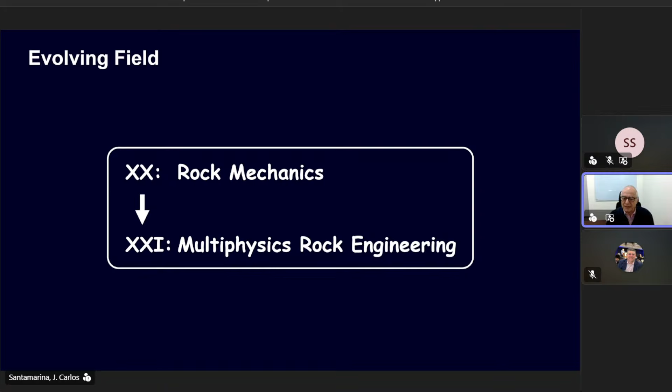The title of the presentation is on fractured rocks, and let me start with the following statement. This is an evolving field. Throughout the 20th century, we thought of rocks in the context of rock mechanics. However, as we are moving further into the 21st century, now this is not about mechanics alone, it's about multi-physics rock engineering. And this is readily noticed if you visit the ARMA conference or the journals in our field, and you see that the classical themes used to be laboratory mechanics, rock mass classification.

It was quite empirical, quite deterministic, and it was driven by the infrastructure development, the tunnels, the support design for the tunnels, slope stability within the mining industry. For example, rock burst has always been a challenging problem, and lots of activity related to petroleum geomechanics, such as fault reactivation or wellbore stability.

However, if you see the titles that are beginning to prevail in our journals and our conferences, what we see now is all about multi-physics, fractured rocks, coupled processes, thermo, hydro, chemo, biomechanical, very extensively instrumented, both laboratory and field implementations. And now more and more we see physics-informed machine learning and AI-assisted engineering.

And the drivers are also evolving. There is a lot of influence related to the energy and the energy transition. For example, we see the carbon capture and storage, compressed air, hydrogen, the whole reuse of existing energy infrastructure and the decommissioning and the deep underground. So it is not that the classical problems are behind us. It is that there are great challenges and opportunities ahead of us.

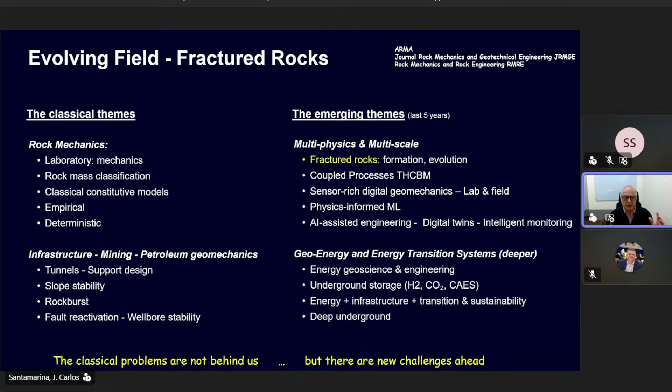And in this context, I would like to present the following slides, split in three big groups. One is to talk a little bit about intact rock and the formation of rocks. Part 2 will be a little bit on fractured rocks, and part 3 then will merge all these together, exploring properties and processes. As the saying goes, there is a little bit old, there is a lot borrowed, and there is something new as we go through this presentation.

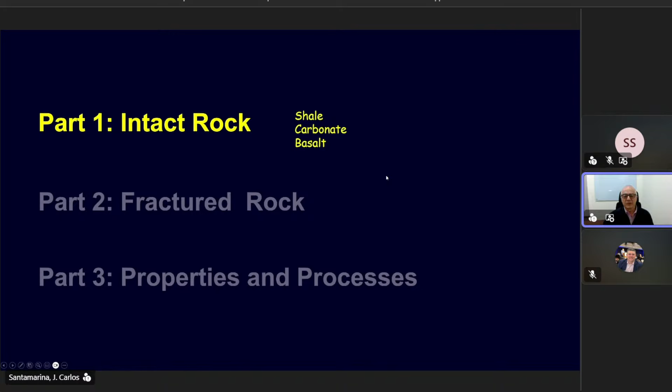I will address 3 rocks today, the shales, carbonates, and basalt, and the choice is not arbitrary. It's because of shale gas, most of the remaining oil is in carbonates, and basalt because mafic rocks are all of a sudden regaining some interest in the context of carbon mineralization. But in order to properly work with these rocks, we need to understand where they are coming from, and so shales. The first thing that comes to our mind when we think of shales is that idea of fissility, the idea of breaking in that blockiness that is not so obvious or easy to understand.

And once again, let me remind you that the playing field of the energy sector in the US and around the world has been dramatically changed in the last 20, 25 years because of shale gas, whereby from a well pad like this one, probably there are 10 to 20 or more horizontal wells running sometimes 2, 3, 5 kilometers away from the pad in an amazing deployment. But there are still important questions related to that.

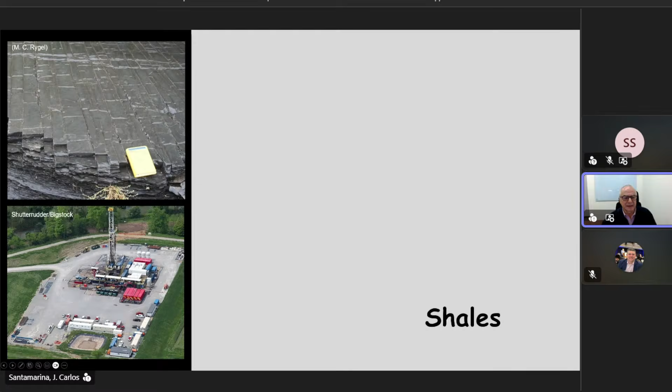And so let's address shales, and shales are very complex because in order to understand shales, we have to start really at the atomic scale, at 0.1 of a nanometer, because that is where molecules, water molecules and ions are interacting with the clay surface, what some of you will recognize from Jim Mitchell's work, and the double layer and that type of phenomena, and osmotic pressures.

But then these clay particles really are not working that independently by the time they have been buried for a long time and pressure, and they work in teams forming tactoids. And these are these bunches of clays. There are maybe tens or hundreds of clay layers forming these tactoids, and they bend and they break like when you play with cards.

And as we begin coming up in scale, all of a sudden we see the layers and the strata. And if it goes bigger and bigger, now we see the big reservoirs, which may be hundreds of kilometers. So folks, 100 kilometers is 10 to the 5 meters, and we started at 10 to the minus 10, so we have gone through 15 orders of magnitude. This is challenging, and these are shales.

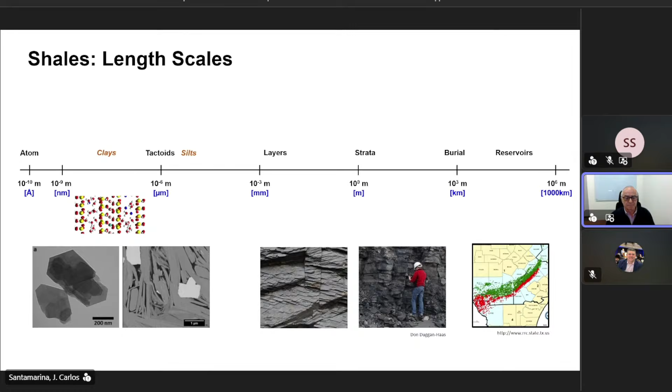I used to think that shales were highly compressed clays, but that was very short-sighted. Actually, shales are a mixture of carbonates, silicates, and clay minerals. And depending on what percentage of clay minerals, clay may be dominant and control all the behavior, but that is not necessarily the case.

And when we zoom in and we look at shales, remember that probably they started like a slurry with random orientation, but then after they have settled and gotten squeezed by the overburden, we see the more rotund particles, the silicates, the carbonates, and precipitates, probably pyrite framboids, and this porous sponge, which is the organic matter. This is a shale. 1%, 2%, 3% of organic matter gets trapped in the sedimentation process, and that organic matter is the one that becomes the kerogen and the gas that leads to shale gas.

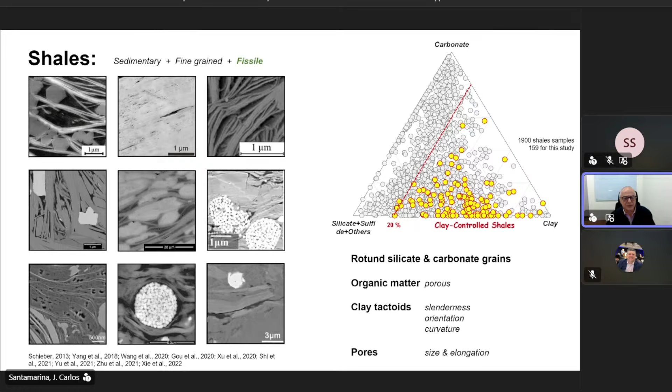So let's try to understand this better. And so we took UDEC and we represented every particle in UDEC, and these are different combinations in that triangle that I showed you before. So we may want to focus here on the right-hand side. And in this case, you see the organic matter are these darker blobs. You see the tactoids that have bent around. In fact, we have calibrated the program to capture the stiffness of these clay tactoids. And we actually are running measurements here in the laboratory with very thin films to get those properties right.

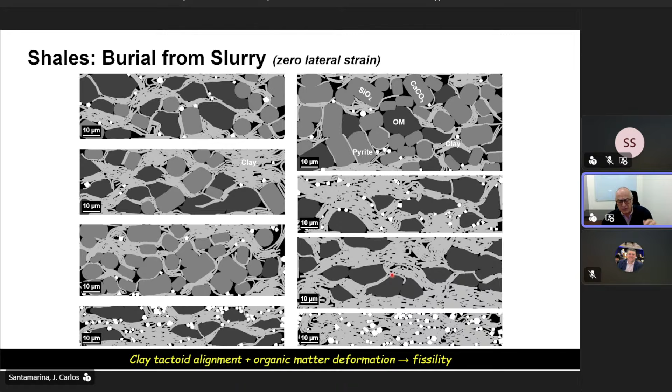And so what happens is that as the clay sedimented from random orientation in this suspension, and organic matter got trapped and some of the rotund particles as well, the particles become increasingly more aligned transverse to gravity. And not only the clay particles become aligned, but the organic matter, which was quite spherical to begin with, now it is soft and viscoplastic, and it gets squeezed and forms layers across. This is the origin of fissility. Without this formation process, we would have a mudstone. If we have a shale, it's because this alignment has taken place. And we have huge implications for all our design and working with shales.

Now, let's talk about the genesis of carbonates. And first of all, let's recognize that we've been working with carbonates for a long time. The Sphinx is a single chunk of carbonate, and the bulk of the pyramids are all carbonate blocks. And these date from 4,600 years before us. But it was all massive. By the time the Greeks were building the Parthenon, the columns and the beams had to be very thick because they couldn't take much tension. In fact, if you go and observe carefully, many of them are actually exhibiting shear fractures near the support. The deformation failure mode has changed. And that is 2,500 years ago.

And then by the time the Romans come about, they learned really how to use the material and geometry together, and they developed the arch leading to the Colosseum and all the beautiful archwork from the Romans. So in this process, we learn the strength of the materials and the properties of the materials.

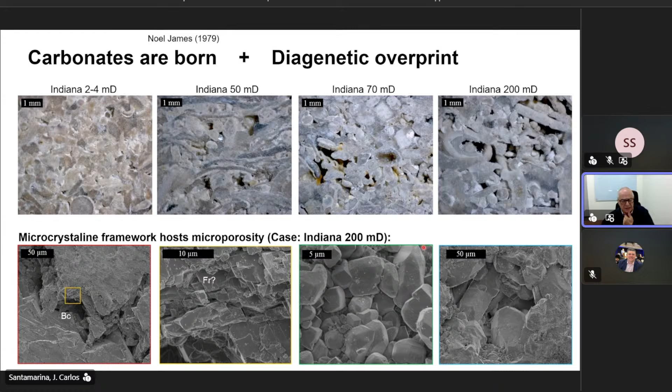But where does it come from? Somebody said that carbonates are not made, they are born. And why? Because it's all about bioactivity in the shells and the foraminifera, etc., that gets gradually buried. And during burial, the pressure and the chemistry come together. There is pressure dissolution and reprecipitation, and sometimes they form these micrites, carbonates, where there are reprecipitates. This is a carbonate, born, and they are diagenetically overprinted with these processes during burial.

So, not surprisingly, if it started from particles, at very low confinement, it keeps very high porosity, and in fact, it goes to the porosity of an extremely loose sand, like a carbonate sand. Then it gets gradually buried, and they're diagenetically modified, building up not only stiffness, but also strength. Therefore, these are almost like percolation equations that both stiffness and strength disappear when you go back to a suspension.

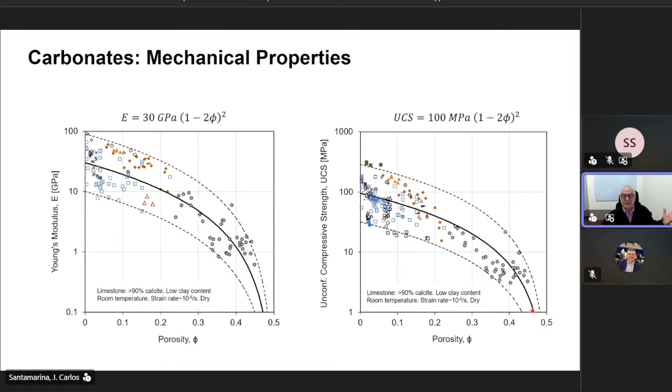Now, what happens to the permeability of carbonates? Initially, this was a real cloud of points without discrimination. But then Lucia went and recognized that all carbonates are different. So if you look at carbonates carefully with thin sections or in the microscope, etc., you realize that some of them are made of very small particles, and the fines control the permeability. Some of them appear almost like a sand with no fines, and there are different names the geologists use to characterize these rocks.

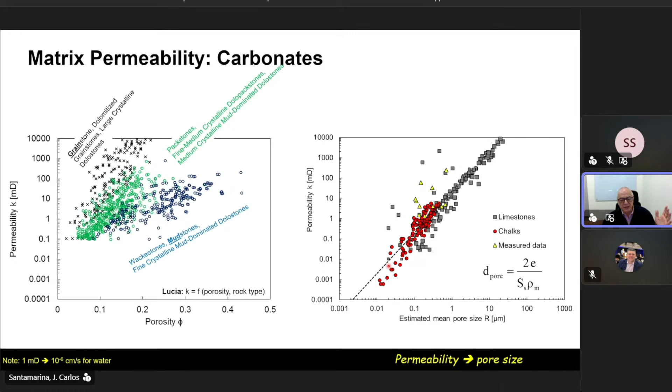So if you take porosity and type of carbonate, like fines content for the soil mechanicians, this is totally equivalent to that, you begin to see that you can begin predicting the permeability quite well. Now, if that is the case, I can combine the porosity or the void ratio in this case, and how much surface is available, the specific surface, to get an idea of what is the mean pore diameter. And now if I plot that data of permeability versus that mean pore radius or pore diameter, the correlation becomes surprisingly robust. This is the formation of carbonates and the development of stiffness, strength, and permeability.

Now, I said that the other rock that I wanted to explore with you today and from the genesis are the basalts. 40 years ago, in the 1980s, geochemists recognized that basalts are not as stable as we thought, that under certain conditions, the geochemistry can be quite fast. And then they began doing some calculations starting 25 years ago, and they said, yeah, we may be able to capture the CO2 injected into basalt formations, mafic formations, calcium and magnesium silicates, and this will react relatively fast and convert the CO2 with the dissolved cations into calcium and magnesium carbonates, so we mineralize the carbon.

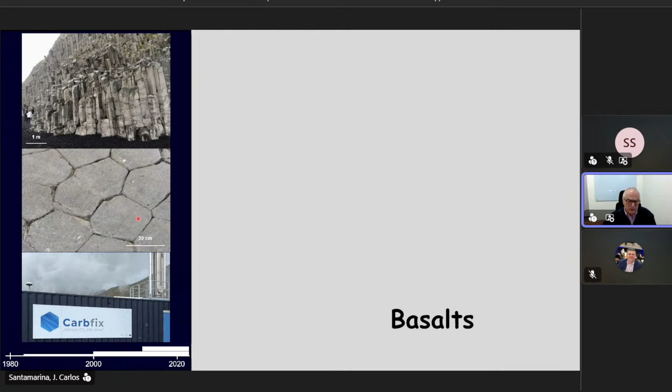The most beautiful example is CarbFix. There is also a project in the US. CarbFix has done it very successfully in Iceland. The issue is, what is the aperture of these fractures and what is the porosity of the rocks? The fractures are always responsible for the highways of transport, and the porosity in the rock is all about storativity and then reactivity. And so we went back to look into these formations, and we have visited a large number of basaltic formations, and this is more or less a summary from the literature and our own experience.

We have a magma chamber, and the magma has lots of dissolved gas. So as it begins coming out, it gets depressurized, gas comes out of solution, nucleates forming bubbles, like when you open a Coca-Cola bottle. And then these bubbles begin growing, and sometimes they coalesce, and sometimes they expand so much it's an explosive eruption, or sometimes it just flows out, forming lava fields. Those lava fields eventually cool relatively fast for crystal growth, and so it forms these basaltic formations. And if the cooling is slow, then it develops a contraction pattern similar to desiccation cracks, but now it's because of thermal contraction, and they begin splitting, forming these columnar shapes.

Now, if what I said is true, then these are different field case histories that we have analyzed to get the statistics of block size and the statistics of fracture aperture. The fracture aperture must reflect the thermal contraction of the block. So they must be related, and indeed that is the case. The contraction factor, alpha, the thermal contraction coefficient, is affected by mineralogy, but this is very predictive. And this is very important because this is the space where fluid flow will take place and mineralization, volume expansive carbonation will occur.

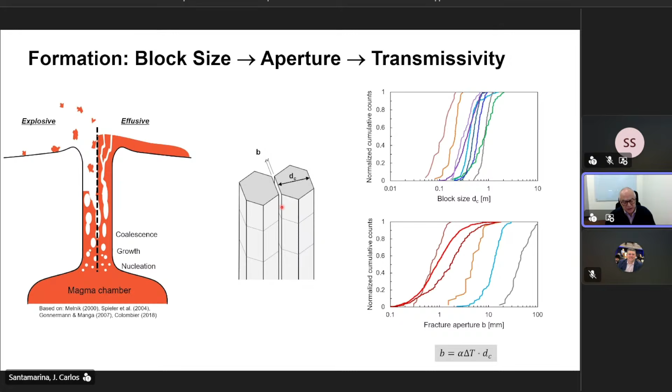Now, when we look into permeability of the matrix, we have to see how did these bubbles coalesce and merge. And sometimes you look at thin sections, or you look with a microscope and you see that they coalesced, but it was already quite viscous. So you see actually the two bubbles are still preserving their shape and sometimes creating contiguous pathways for flow. So clearly then, as the porosity increases, the probability of having contiguous paths for transport increases, and so does the permeability.

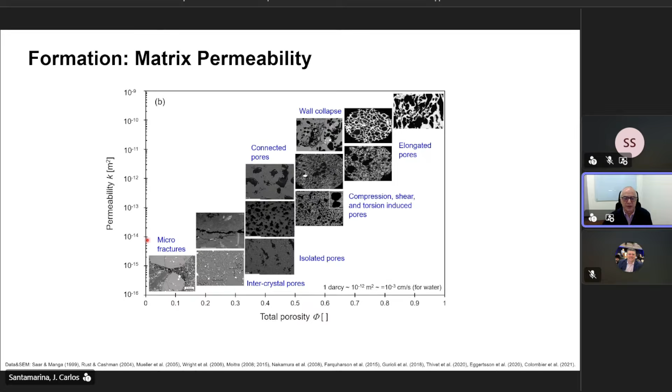Of course, we're here in what, 7 or 8 orders of magnitude, but there is a change in the pore topology as we move into lower and lower porosity and lower permeabilities. When we combine all the data available now, we can do something very neat. We can actually simulate in 3D the coalescence between bubbles, and depending on the amount of bubbles and the porosity, there will eventually generate more and more conductive pathways. And then we use Navier-Stokes to see the permeability of the basalt.

In the background here, all the gray points are unclassified. We really don't have more information about the type of formation. But then we have pumice and we have the basalts, and this is our digital rocks following the methodology I just described, giving us great insight into the evolution of porosity in the matrix of basalt, and from the previous part, the aperture, the evolution of transmissivity in the fractures between the basalt columns.

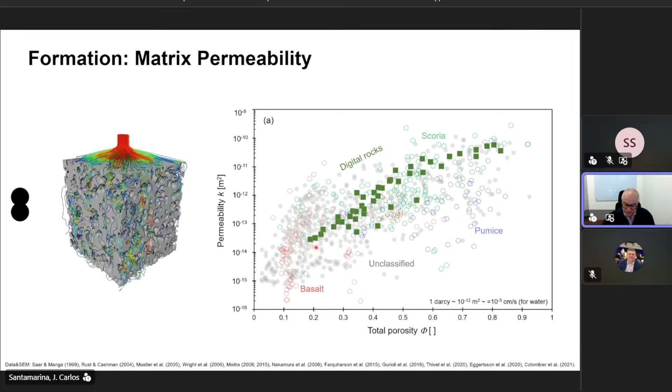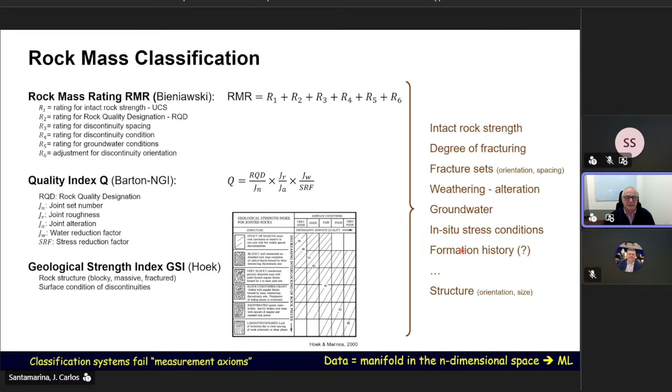Through the insight of all these studies, now we recognize what are the most important parameters that govern the rock mass behavior. And now we're going to begin placing this into large data sets, and yes, using the power of machine learning to discover that manifold in the n-dimensional space where the rock mass exists in order to predict its behavior. This is where we are today.

But let's go back to fractures, and we always start, if you look at the classical books or the National Academy of Engineering, two compendiums of fractured rocks, we go back to mechanics, mode 1, mode 2, mode 3, and we see that conjugate fractures at multiple scales are telling us where the sigma 1 is, and probably an idea of the friction angle being the tangent of 45 plus or minus phi/2 in the Mohr-Coulomb formulation. And we can even extend these ideas quite nicely.

For example, if there was a lava riding over a sandstone and all of a sudden vaporizing the water so fast that it produced a hydrothermal fracture and this plumose shape, you see how the fracture evolved. Still mode 1.

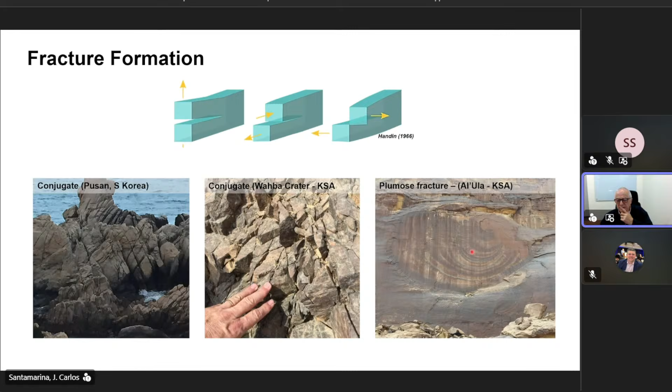The story gets more complex, for example, when we have massive foldings, and of course it is satisfying mechanics, but now there is a rotation of principal stresses and relative stiffness between layers, trying to break a multi-layer set of Oreo cookies with the soft and the rigid, etc. How would the fracture pattern form, and where would it break in tension and where would it break in shear?

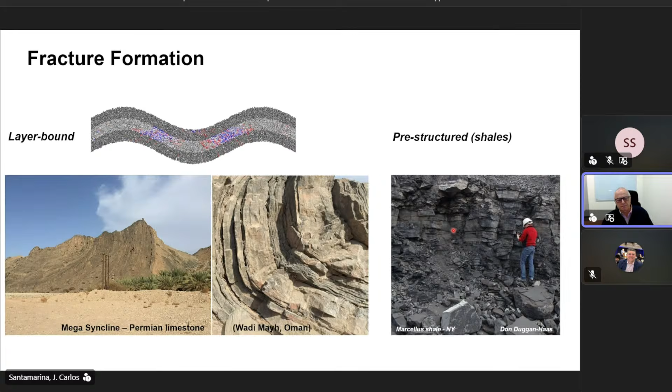But furthermore, let's go back to shales. When we go and fracture a shale, we do fracking, hydraulic fracture, how will it fracture when it is fissile and it has this pre-structured nature? So we explore that. And in fact, we were inspired by a visit to Machu Picchu. When you see here the settlement of the end of the foundation, you see that the distortion propagated upwards. By the way, notice the size of people.

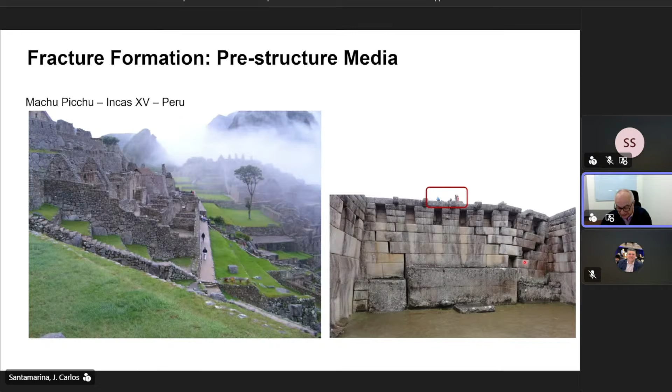These are huge blocks. And there is distortion, and this dilational distortion actually leaves lots of gaps, which is going to dramatically increase hydraulic conductivity beyond where the fracture is. Let me show this in a more demonstrative way.

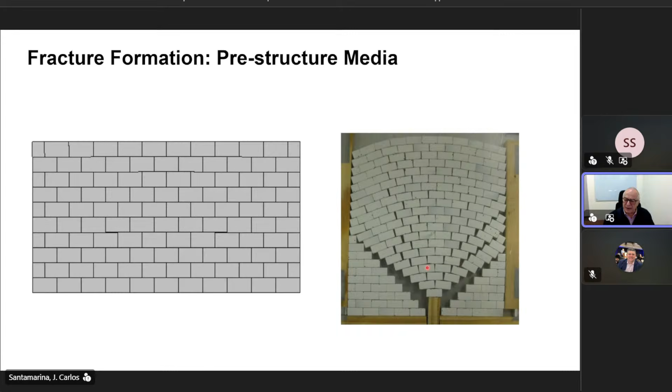This is a set of blocks, and when you push, you form the wing fracture, but follow what is happening at the center. All the fissile positions, or these pre-existing fractures, begin opening up, and this produces, first of all, very diffusive acoustic emissions. If you were listening carefully, it's not nicely defining a penny-shaped fracture, but furthermore, it's creating a network of passages for gas recovery.

We tested this. This was the beginning of a large scale true triaxial. It's 0.5 meter by 0.5 meter by 0.5 meter with 6 bladders to control sigma 1, sigma 2, and sigma 3. And then we inject at the center a thick caulking fluid.

But we have to assemble the fractured rock mass. And so we did it with different topologies, different fabric arrangements. In any case, let me show you one result.

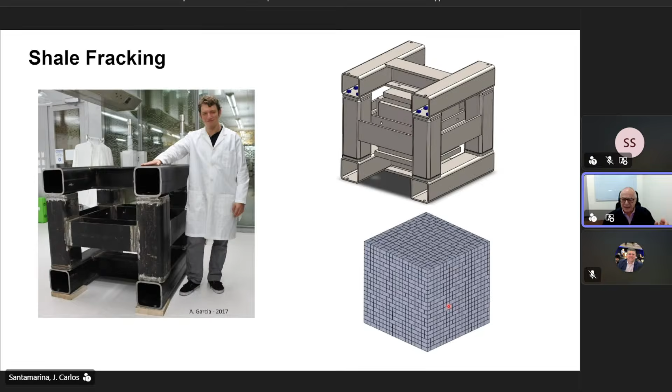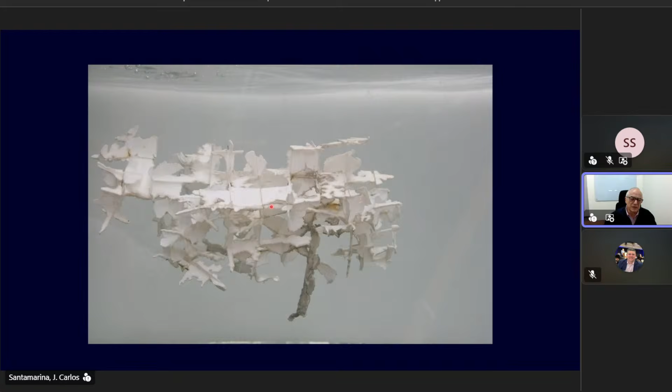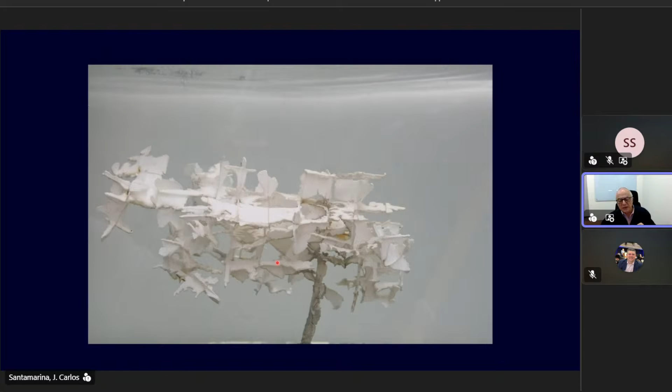This is by the time you pull out very carefully and you recover all the invasions of the caulk and silicone; this is the imprint of the fracture. It's far away from a penny-shaped fracture, and it's invading sometimes along corners and between blocks, and along the dilated plates of blocks, between blocks, is invading all those, which is wonderful in order to recover shale gas.

So now I'm ready to talk about some of the properties and processes that we may encounter as we move further and further into this multi-physics rock engineering that our field is migrating towards. So we already said that fractures form the geoplumbing of the formation in most cases. There could be rare cases that excessive shear has formed so much gouge material that they are actually aquitards, but in most cases, fractures are the geoplumbing of the formation.

And the key here is that fracture transmissivity scales with the cube of the aperture. That means if we have a set of fractures, parallel fractures, and they have an aperture distribution, and they will, nothing is identical, so there will be a mean value, but some of them will be narrower, some of them will be wider, typically with a coefficient of variation of about 0.5.

And then we use that rule to see how much each fracture is transmitting, and I add them up and I see how many fractures are responsible for 90% of the flow. You end up that 1% of the fractures carry 90% of the flow in most cases. This may have some advantages.

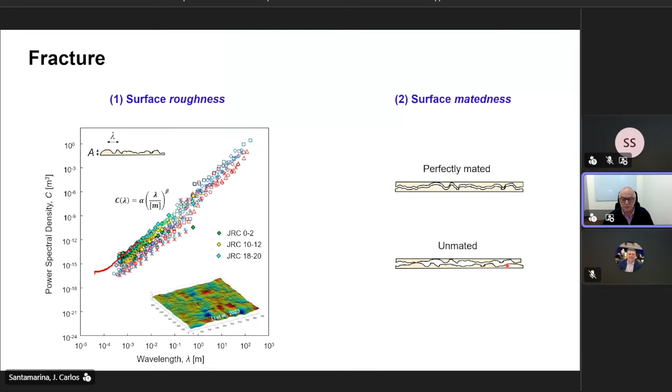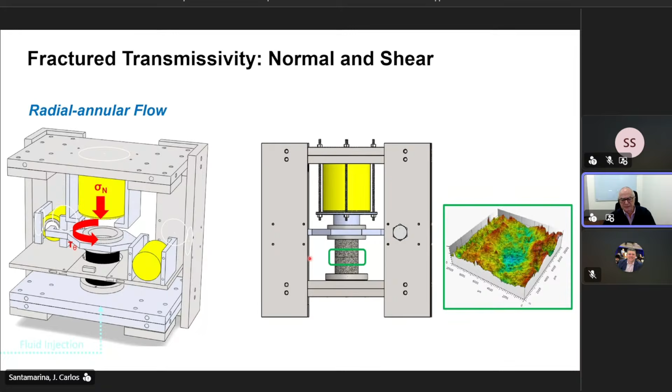So to study that, we built this ring shear device where we can control the normal stress and apply torsion. And in summary, this is the fracture. Let me conclude here by saying that the transmissivity, as you can imagine, decreases as we increase the normal stress, and the transmissivity increases as we increase the shear displacement. Having this type of fitted constitutive equations is critical for upscaling and for our numerical modeling abilities.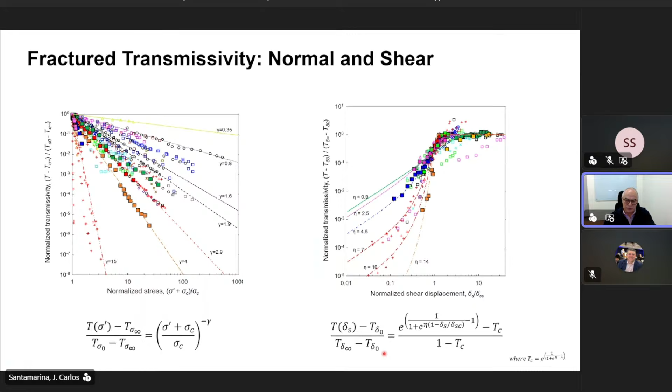In soil mechanics, we have talked a lot about unsaturated soil behavior with huge accomplishments. We don't speak so much in that wording in the rock mechanics field, even though oil recovery is all about mixed fluid flow. By the way, the emphasis in rocks is about flow. The emphasis in soil mechanics is about effective stress, let's say something along the lines of Bishop with its limitations.

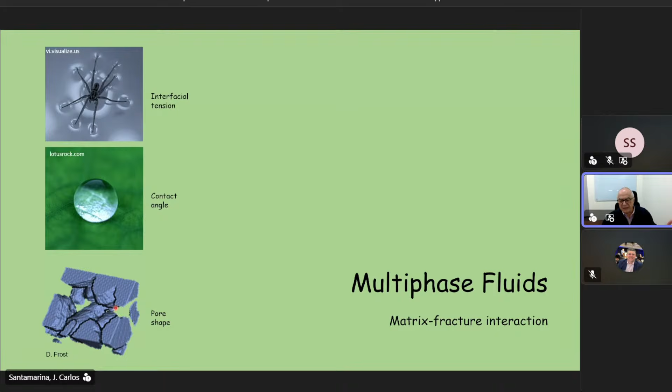So here the emphasis is on flow, but it goes back to the same physics: interfacial tension, contact angle, and pore connectivity and topology. So now we can also measure the soil water characteristic curve for a rock. In other words, the water content versus suction for a rock, and determine, for example, the air entry value.

Now we can relate the air entry value to the largest pores in the system, because if it is a water saturated rock, air will enter into the largest pore first. But the air entry value that we pick up from these saturation capillary curves really correlates best with the 85th percentile of the pore size distribution. And these are for different rocks.

And this air entry value is very important because that is the maximum pressure that is exerted isotropically around the whole block. After that, air invades and suction is patchy, is in regions, both in soils and rocks. But that is the point where that equivalent isotropic confinement is exerted throughout the whole phase.

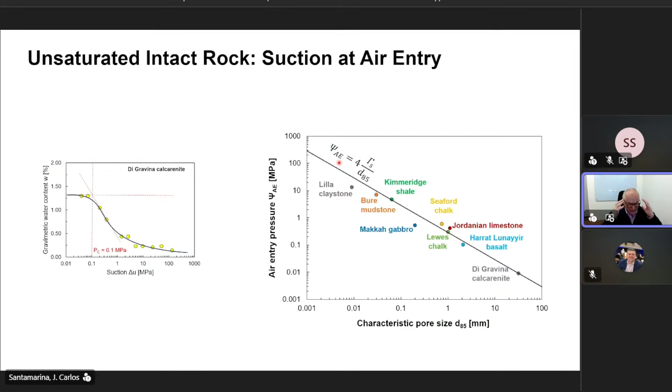And now we may wonder, how much will the rock expand if we remove that suction? We tend to think that rocks are infinitely stiff, but they are not. And so this is the case in point. When you take a rock and it is fully saturated, and you begin here saturating it, and then you dry it, it does experience quite measurable strain.

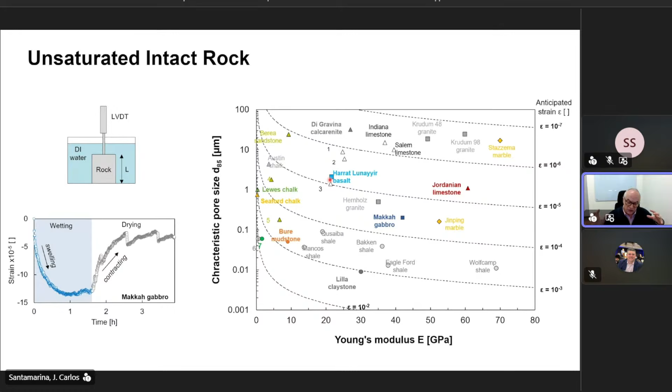And of course, the strain will be higher if the rock is soft, low stiffness, and if the rock has very small pores to mobilize high suction. But it's measurable even in some granites and marbles and limestones. This will have implications, for example, for the ability to seal around wells for decommissioning or formations in order to store gases.

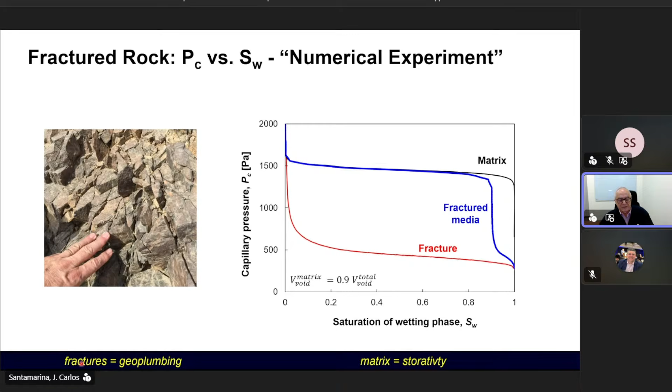So now we go back to this idea that fractures are the geoplumbing. You see, along the fractures is where the fluid is going to flow primarily. But if we do the suction saturation curve, this is for a fracture. We also measure that one for a fracture. And this is for the rock matrix. This is the combined for the fractured rock. And it is clearly seen that most of the storage is taking place in the matrix, while flow is in the fractures. That is the interplay between the matrix and the fractures.

Now let me jump into another phenomenon that is gaining great relevance, and it's along these lines of multiphysics, thermo-hydro-chemo-biomechanical coupling. Here I'm going to talk about hydrochemical coupling. And two phenomena are always intimately related. They are the two sides of a coin: dissolution, precipitation. And they will coexist, not in space. They will be displaced in space, but in time. In other words, for example, inject an acid front, you will begin dissolving, but at some point, most likely, you will end up precipitating. So how does that happen?

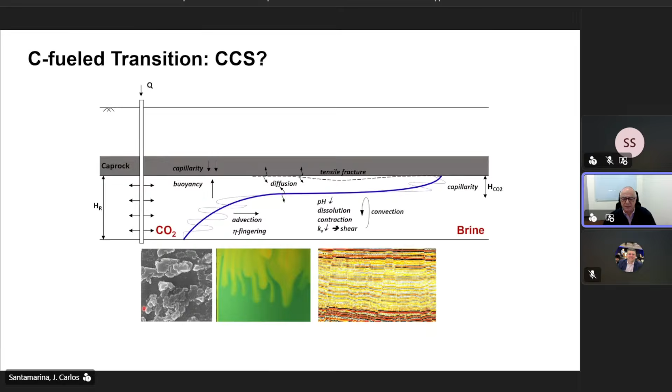These are phenomena that are going to coexist in carbon capture and storage. I will not go into details, but they're critically important here. And as I said before, in some places there will be dissolution. So this is a three-dimensional plot: how fast it dissolves, how fast it moves through, and how fast it diffuses controls the phenomenon, but it is easy to recognize.

If the fluid flows very fast compared to the rate of dissolution, the fluid will reach far distance and continue dissolving the fracture, so dissolving the fracture in a more or less homogeneous way. However, this is the opposite case, if the fluid dissolves the rock very fast, imagine that you're trying to inject water very slowly into a bucket full of table salt, so it will dissolve mostly at the entry and less further out, by the time the fluid has already become saturated.

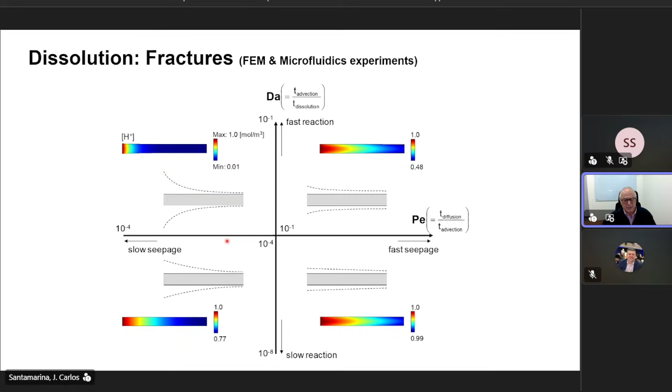So the form, the rate of invasion, the rate of dissolution become very important for the pattern of dissolution. On the other end, there will be precipitation, and it reminds us of frozen ground or the effect of salt precipitation and concrete durability. They are all exactly the same processes.

The precipitating crystals begin to grow. In order to go through another pore, they have to go through, and then they have like capillary pressure squeezing them, and so they can do two things. Either they invade the next pore or they push grains out and they fracture the rock. Recently, my colleague here, Hain Huang, has really decoded and captured in mathematical form how this takes place during carbon mineralization in rocks.

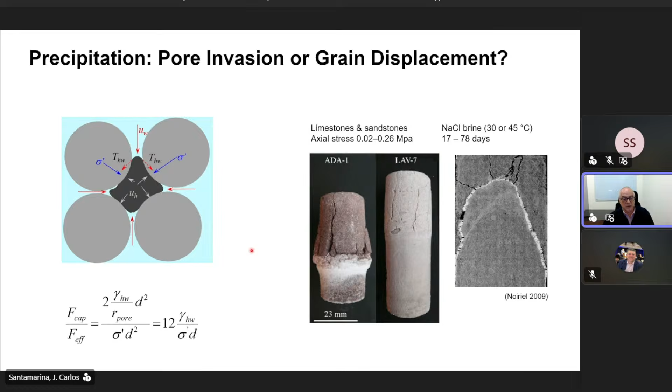So with that in mind now, imagine that I have a fractured rock mass. These are different rock slabs stacked together. We drill a very small hole and we put a thermocouple above and below each fracture. In this system, we apply a load, we put a hot plate at the top, a cold plate at the bottom, we measure the thermal conductivity.

And at equilibrium, something rarely observable emerges, that within each rock mass, heat conducts very effectively. But then it gets kind of stuck at the interface because of thermal contact impedance. And then there are these jumps in temperature. Now, how can I reduce the thermal contact impedance? Two simple ways. One is I squeeze the rock more. The other one, I put fluids inside.

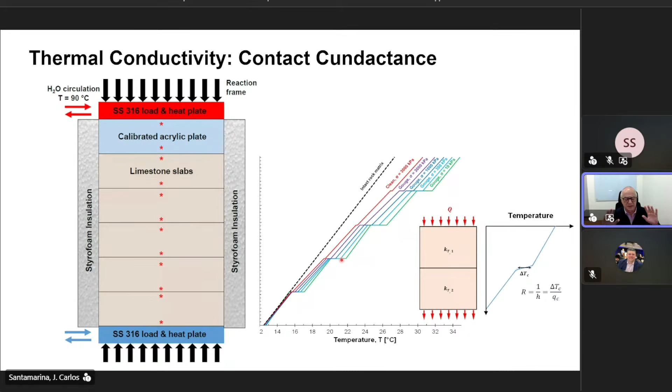This is the same as trying to grab a very hot pot. You don't squeeze it with your fingers, and you might as well use a cloth, but a dry cloth, not a wet cloth. The same two concepts, confinement and moisture, and this is what the data is showing. I increase confinement, I increase the conductivity of dry rocks, but I increase saturation, and I produce a very high increase in the conductivity of fractured rock masses.

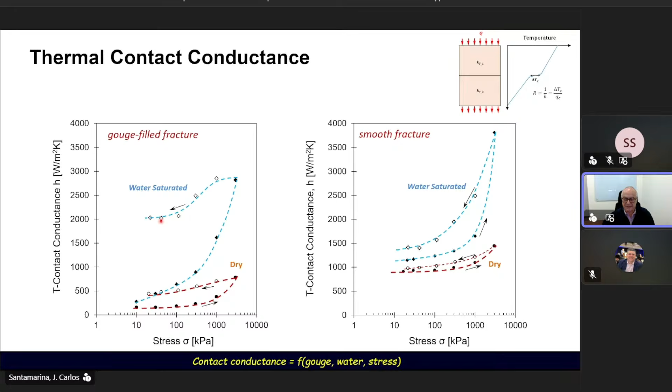In the context of soils, and I keep doing the contradiction here because it's very nice to learn from one and the other. In the context of soils, we recognize that repetitive loads were very important, mechanical, thermal, chemical. In fractures, they are not so sensitive, particularly not sensitive to chemical cycles like it could be for a clay. But thermal cycles are not scale dependent. So they are as important in a sand as they are going to be in a massive rock mass.

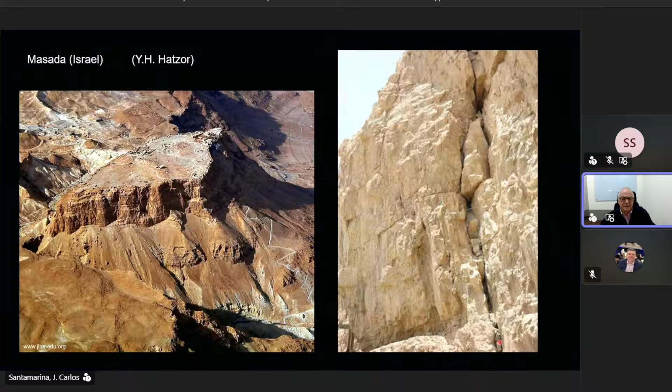Case in point, this is the Masada monument in Israel, and some of these walls are falling down, and this was a study done by Y.H. Hatzor and collaborators, and they put extensometers, and they couldn't find any correlation with rain, next to the Dead Sea it doesn't rain, or with seismic excitation. So we were looking at it, and we noticed these choke blocks that fall behind. And I think that this is the mechanism that is at the heart of how these walls are falling.

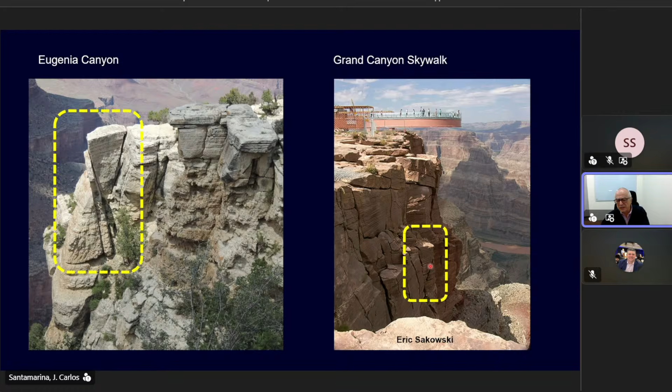And we see this wedging its way into this system, and this is beginning to tilt. This is not toppling. This is not the Goodman's toppling mechanism. This is thermal ratcheting. And I think that the same is going to happen below the Grand Canyon skywalk with some of these wedges. So what is the procedure?

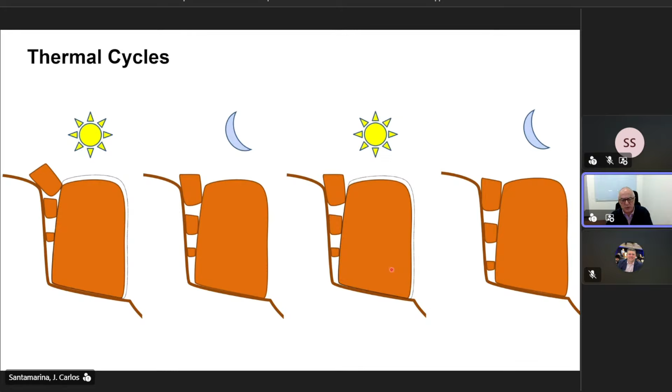When it is hot, the rock expands free in the direction of the free space, including plastic shear displacement at the base. When it gets cold, it contracts because this friction traps that displacement. It contracts on the back, and the choke blocks fall further down, expands to the right, contracts, the choke block falls, and this is beginning to walk, to ratchet, thermomechanical ratcheting its way out. And yes, you can mathematically describe it, experimentally demonstrate it in the laboratory, etc.

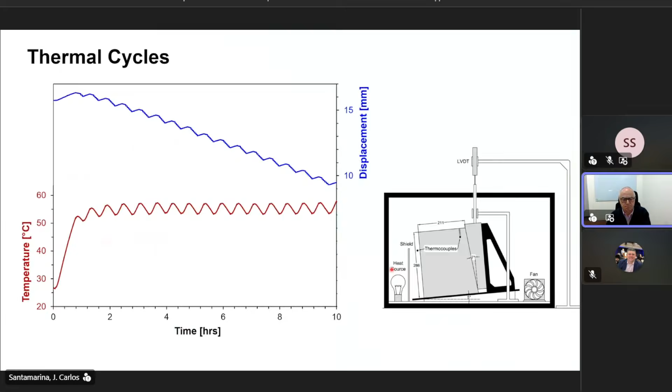So in the last couple of sections, I will address other topics that are emerging. One is that we're getting deeper and hotter. In fact, how hot? Super hot. Super hot meaning that we want to begin operating at pressures that exceed 22 megapascals. This is equivalent to 2,200 meters of water in a water column. So this is pretty deep, and 374 degrees Celsius.

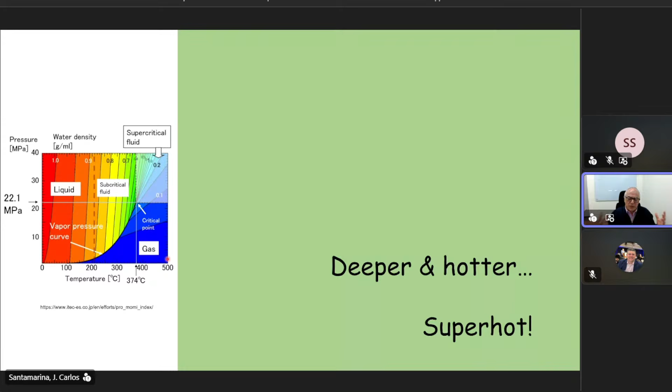Beyond that point, water is very weird. There is no more liquid to vapor phase transformation. Water begins dissolving organic matter and stops dissolving sodium chloride. Sodium chloride precipitates. Very weird. And that would be a wonderful space to begin pulling geothermal energy, because 99% of the Earth is hotter than 1,000 degrees Celsius. So it's a wonderful opportunity. The problem is, how do we get there?

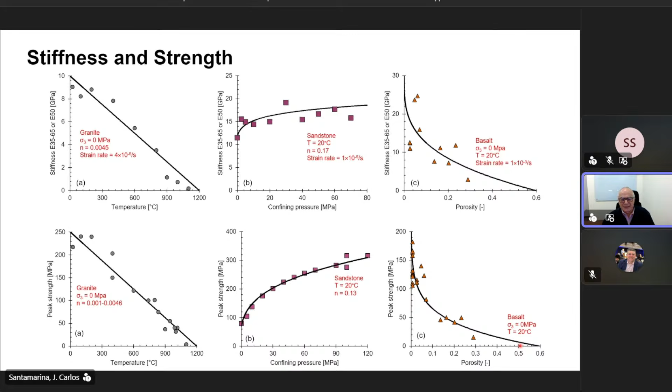Now, if we look at the strength of granite, it also decreases with temperature, increases more sensitively with confinement, like a Mohr-Coulomb and Hoek-Brown, and the peak strength decreases with porosity. Now, we have a large database on this, and it allows us to explore other things. For example, the brittle to ductile transition of these rocks, because if they are not brittle anymore and they are ductile, and you try to do a hydraulic fracture to create pathways for fluid transport to recover the heat, then if it is ductile, it will just inflate like a balloon rather than breaking into a fracture.

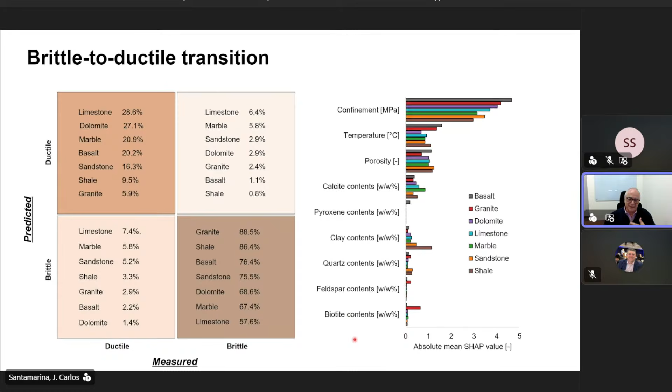And now in this n-dimensional space of all the variables, machine learning allows us to, once again, identify this manifold in this n-dimensional space that we cannot even conceive. But as the data begins to predict, confinement is important, temperature is important, porosity, if you have a shale, clay content, and if you have granite, biotite. Very informative, in addition to being very predictive.

Finally, to conclude, let me say something about modeling, because, as I said earlier, we may not be able to do the experiments that we need to do because of scales and the huge forces that are required. So we will have to do some experiments for whatever we can test and then upscale with numerical experiments. I used to think that that was an oxymoron, but this is a true reality. That's what we need to do. And just to remind you that we have to go back and think in terms of scales.

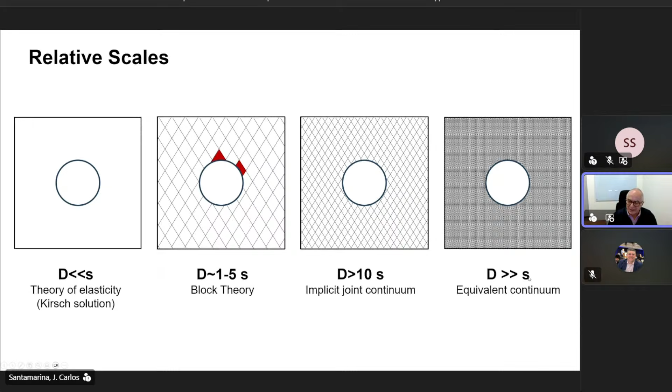If we have more fractures, that becomes more difficult, but it's not an equivalent continuum because it still has the prevalence of the fractures. So we need to implicitly capture fracture effects into the continuum. These are called implicit joint continuum models. Finally, if it is massively fractured, then we have like a soil. Then we go back to an equivalent continuum. And this is what this slide is trying to capture.

In closing, this is an evolving field, actively evolving. We have to start by assuming that all formations are fractured, and recognizing that fractures govern all properties, from the geoplumbing in the fractures to the storativity in the matrix, and these two are interacting in all physical dimensions. We need to combine, we don't have an alternative, physical experiments with numerical experiments in order to do the upscaling. This is all about multiphysics.

This is where the richness of the next phase is, and we are getting into deeper and hotter formations. We will require proper experimental methods and simulators, and now we are also in the presence of these major avenues converging: a revolution in sensors, availability of data, physical understanding, simulations, and machine learning. We're moving into a space of AI-assisted engineering.